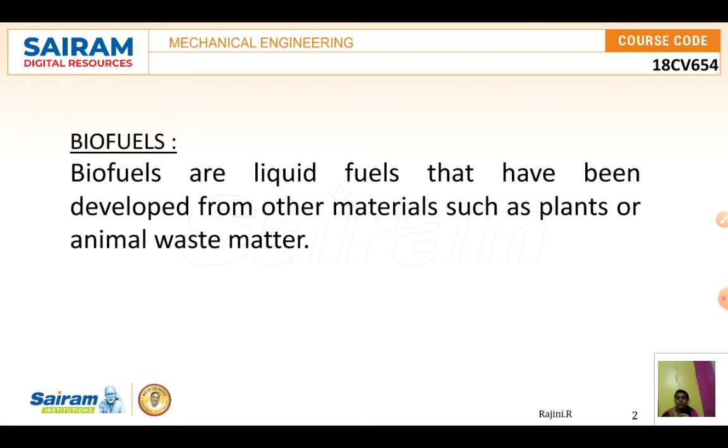Biofuels are liquid fuels developed from other materials such as plants or animal waste matter. These are biological materials derived from living or recently living organisms, most often referring to plants or plant-derived material, sometimes called biomass, and they are renewable resources.

Biomass can either be used directly through combustion to produce heat, or indirectly after converting it into a biofuel. Conversion of biomass to biofuel can be achieved by different methods, which can be broadly classified into thermal methods, chemical methods, and biochemical methods.

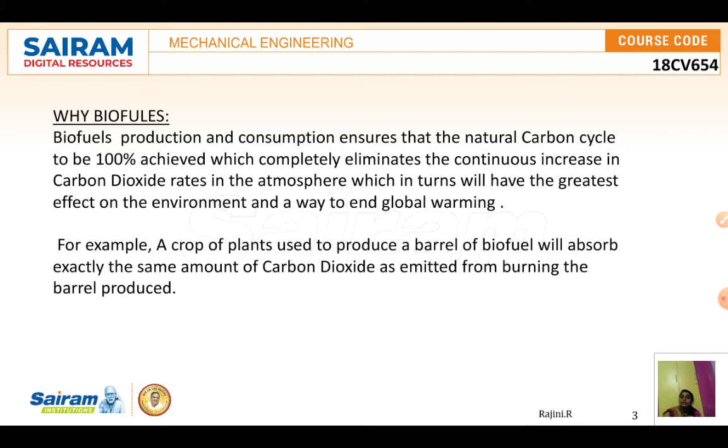Biofuel is a fuel produced from organic products and wastes. The commonly used biofuels are bioethanol, biomethane, and biodiesel. These are the main ones we use.

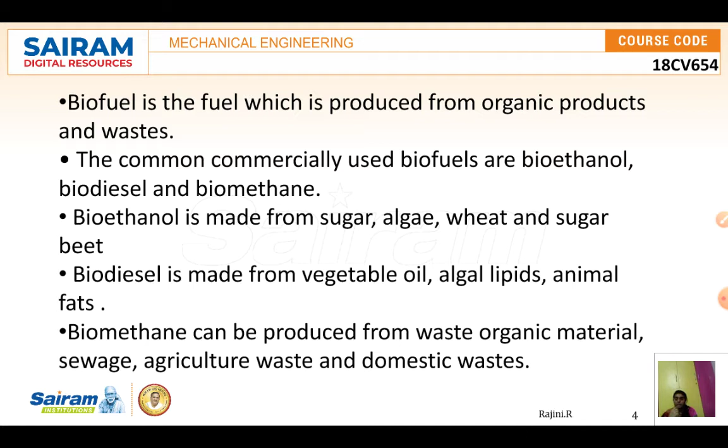Bioethanol is made from sugar, algae, wheat, and sugar beet. Biodiesel is made from vegetable oil, algal lipids, and animal fats. Biomethane can be produced from waste organic material, sewage, agricultural waste, and domestic waste. So these are the different biofuels we have.

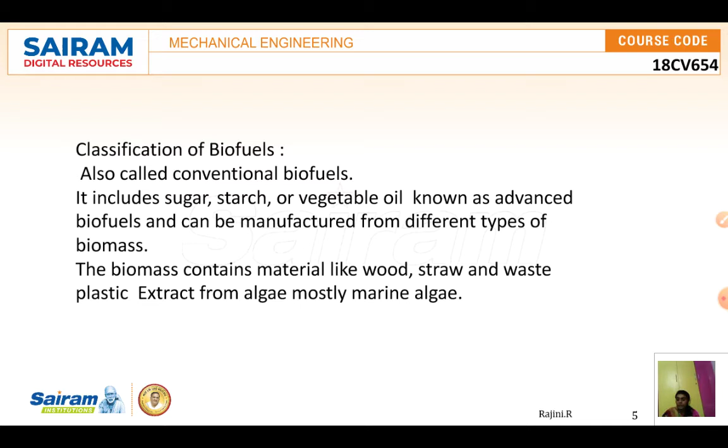Classification of biofuels: there is conventional biofuels, which includes sugar, starch, or vegetable oil, and advanced biofuels, which can be manufactured from different types of biomass, for example wood, straw, or waste plastic extract from algae, mostly from marine algae.

Now let's talk about the limitations and advantages. Biofuel is an inexhaustible energy source because we can grow more trees and crops, and use waste materials. It will continue to exist as long as we make sure to grow more trees.

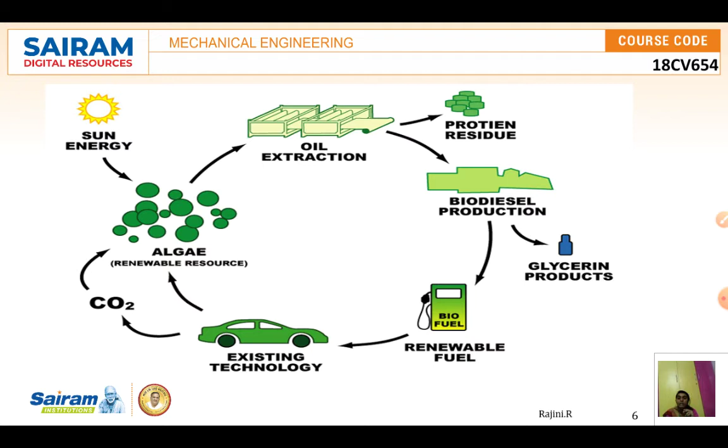Using biomass as a source of energy has many direct advantages, as you can see in the picture. Direct combustion of biomass is used in different ways with lower greenhouse gas emissions; it is renewable, biodegradable, and safer. These are the different advantages of biofuels.

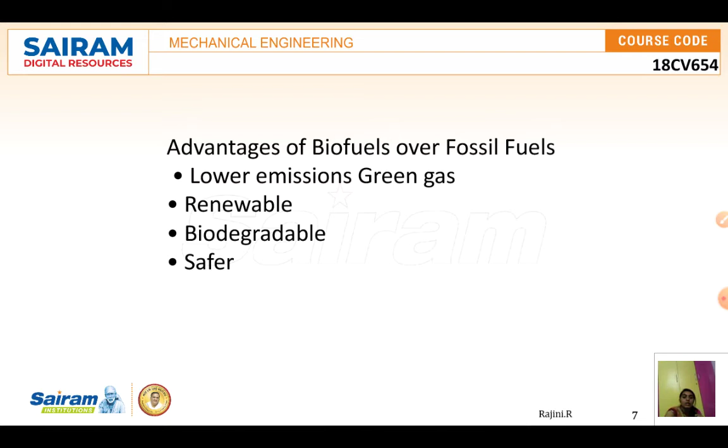Biomass is easily available throughout the world, and the residue from biomass plants can be used as manure. Biodiesel and other fuels produced from biomass are a clean source of energy, not polluting anywhere, directly clean from nature.

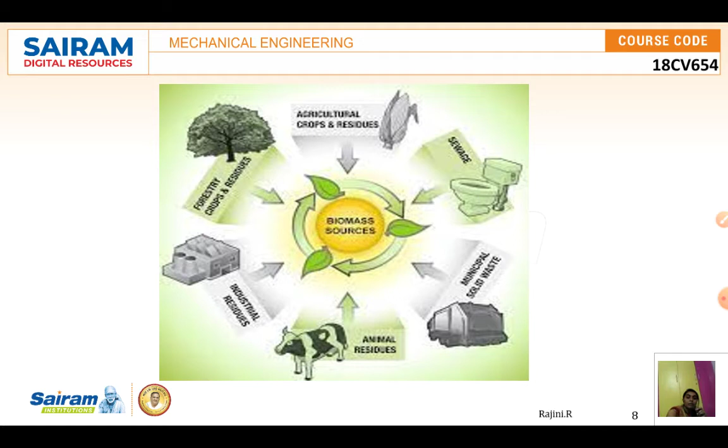When direct combustion of biomass is used to generate energy, it hardly has any negative environmental impact. There are also types of biofuels: first generation biofuels and second generation biofuels.

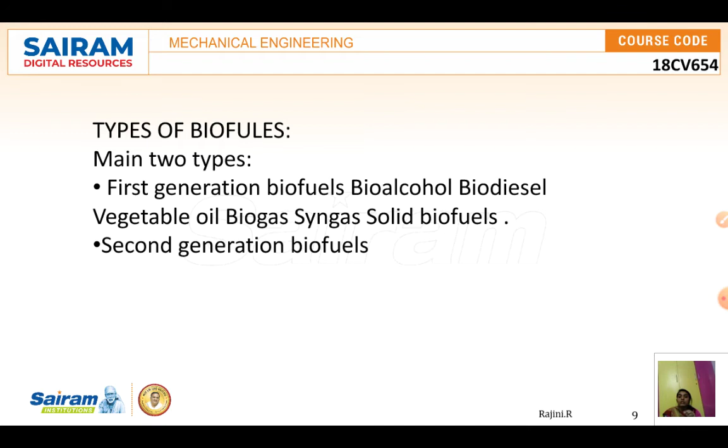Let's talk about bioethanol. Bioethanol is an alcohol made from fermentation, mostly of carbohydrates produced in sugar or starch crops, particularly starch crops such as corn or sugar cane, from which we get ethanol. It is well developed as a feedstock for ethanol production.

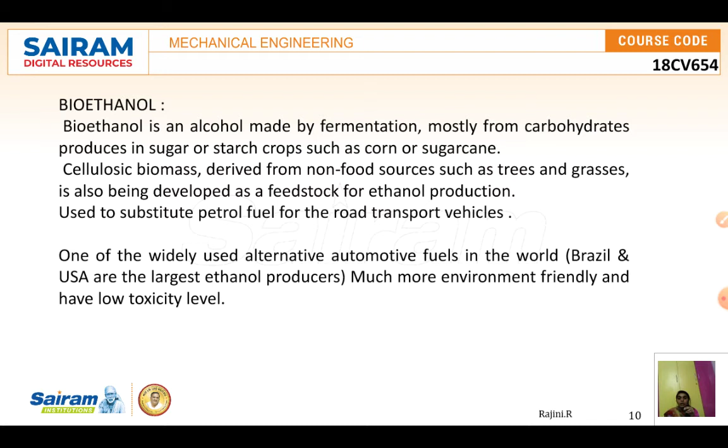Ethanol can be used as a fuel for vehicles in its purest form, but it is actually more commonly used as a gasoline additive to improve vehicle emissions, so that it does not harm the environment.

Applications for ethanol include use as a transportation fuel to replace gasoline for thermal combustion, as a thermochemical reaction fuel in cogeneration systems, and as feedstock in the chemical industry. Blending ethanol with a small portion of gasoline is more cost effective and helps control emissions.

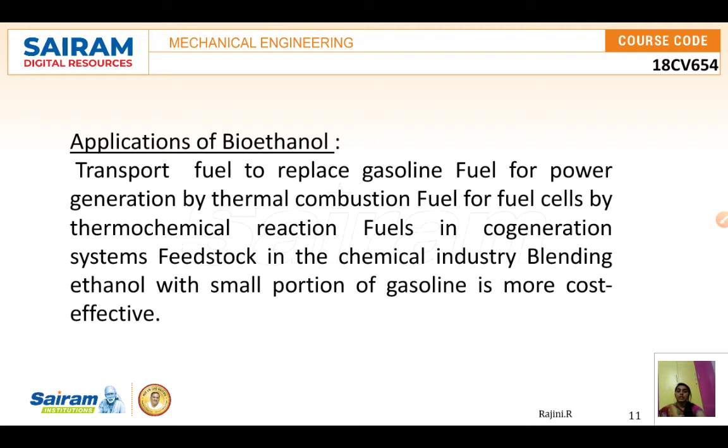Advantages of bioethanol: it burns more cleanly due to more complete combustion, reducing fumes from vehicles and reducing greenhouse gases. It is carbon neutral, which means ozone formation decreases, and it is a renewable energy source we get from nature every time.

Fuel spills from bioethanol are more easily biodegradable or diluted to non-toxic concentrations, so when it comes out as a product, it is very diluted to non-toxic levels. Any plant can be used for the production of bioethanol, as long as it contains sugar and starch.

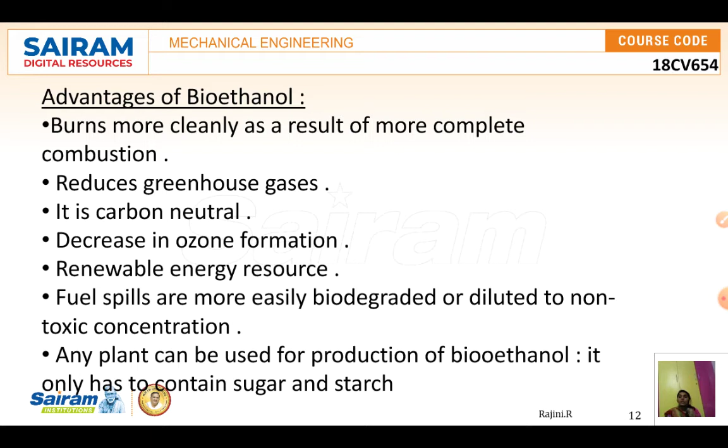That is the only condition, it should contain some of the sugar. So next one is sugar and the starch. Next one is disadvantages of bioethanol.

A large amount of land is required to grow crops, so agricultural fields and natural habitats, definitely natural habitats it is going to destroy.

Due to the higher prices of bioethanol, some farmers may sacrifice food crops for biofuels, and if they're sacrificing their crops, that is definitely a disadvantage. Because of this, food prices are going to increase if concentration shifts towards bioethanol production.

So production should be good. If the production is more, definitely the prices will be in the proper manner, and it will be less.

During production of bioethanol, a huge amount of carbon dioxide is released. Also, it is not as efficient as petroleum, not that much efficient compared to petroleum. That is one more drawback of bioethanol, not as effective as petroleum.

There are also cold start difficulties, those issues will be there, and also difficulty in transportation. So these are the disadvantages of bioethanol.

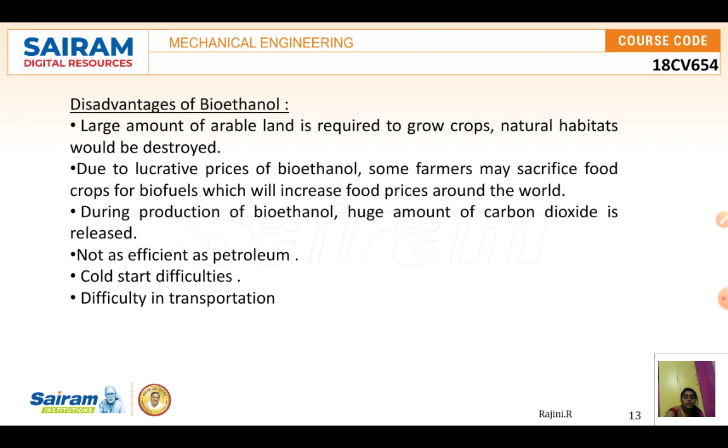And as I said, the residue of biomass plants can be used as manure also. And also biodiesel.

Biodiesel is a variety of ester-based oxygenated fuels derived from natural or renewable biological sources such as vegetable oils. We have seen the description of biodiesel and ethanol earlier in the slides.

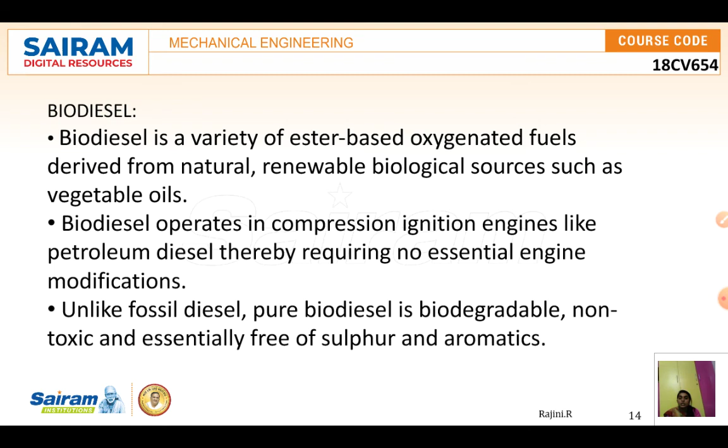Unlike fossil diesel, pure biodiesel is biodegradable and non-toxic, and essentially free of sulfur and aromatics. Biodiesel.

Next, advantages of biodiesel. Biodiesel is environmentally friendly again, and it can help reduce dependency on foreign oils, and also it helps to lubricate the engine itself, decreasing the engine wear and tear. So that is one advantage, and it is safer than conventional diesel.

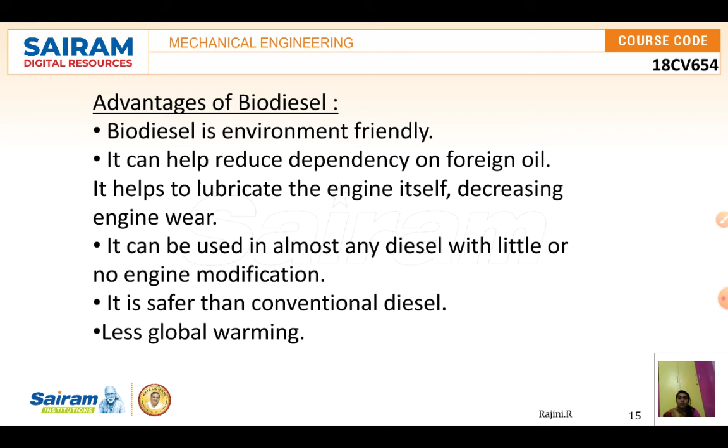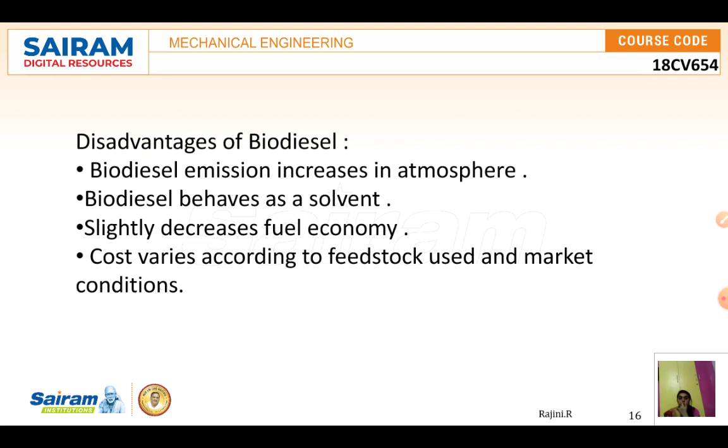Also, biodiesel emissions increase in the atmosphere, that is one more disadvantage.

Overall, biofuels are used for cars and trucks, and definitely diesel cars and trucks can run on biodiesel. It's also used in aircraft and off-road equipment, such as vehicles used in agriculture or other power generation and construction vehicles, making this equipment suitable for biodiesel use.

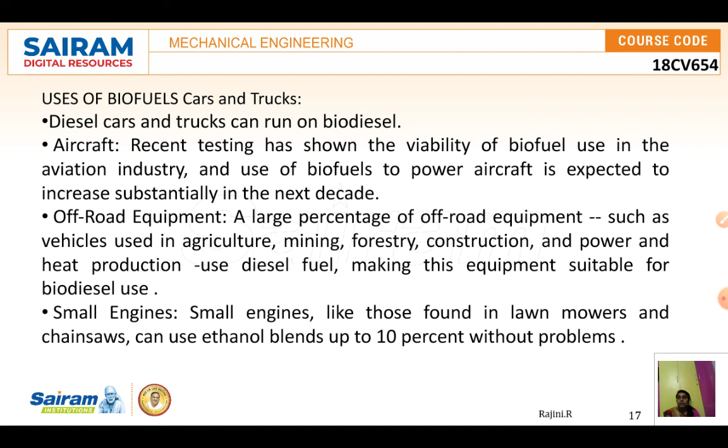Also, small engines like those found in lawn mowers and chainsaws can use ethanol blends up to 10% without any problem. We can use it in small engines, mainly seen in construction fields, taking materials from one place to another.

Advantages and disadvantages of biofuels we have seen in the last slide, it's similar for ethanol and diesel in terms of cost and source material. This will also make an efficient step in recycling.

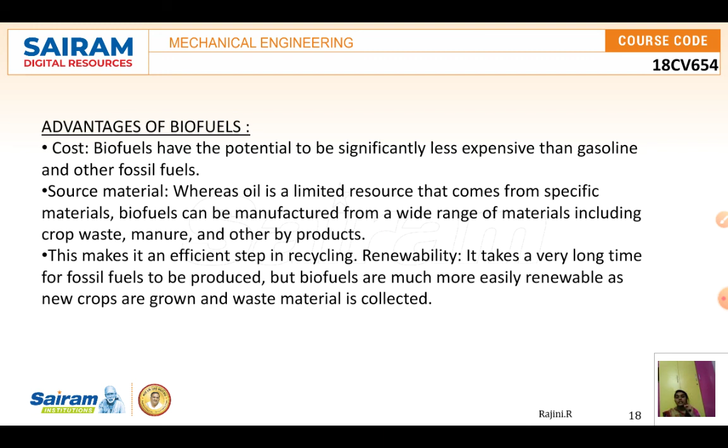Renewability: it takes very long for fossil fuels to be produced, but biofuels are much more easily renewable as new crops are grown and waste materials are collected. Whenever we grow crops, waste material is definitely collected and reused.

The main disadvantage of biofuels would be food prices, food shortages, and water use, as demand for food crops such as corn grows for biofuel production, it could also raise prices for necessary food crops. As food crop production decreases, prices are going to increase.

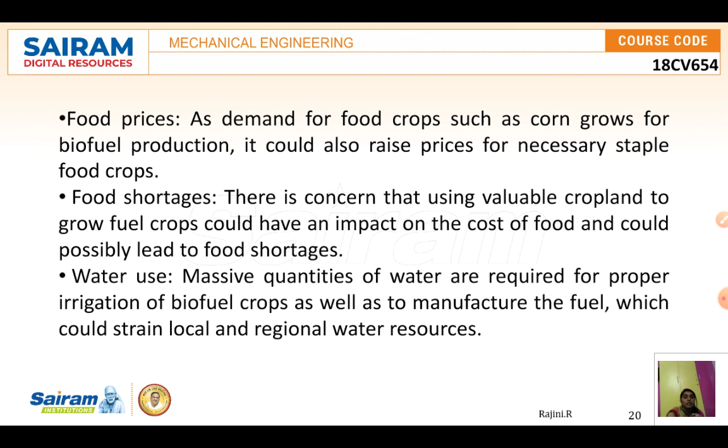Food shortages mean there is concern that using valuable cropland to grow fuel crops could impact the cost of food and possibly lead to food shortages. So these are the details of biofuels, their types, and their advantages and disadvantages. Thank you.